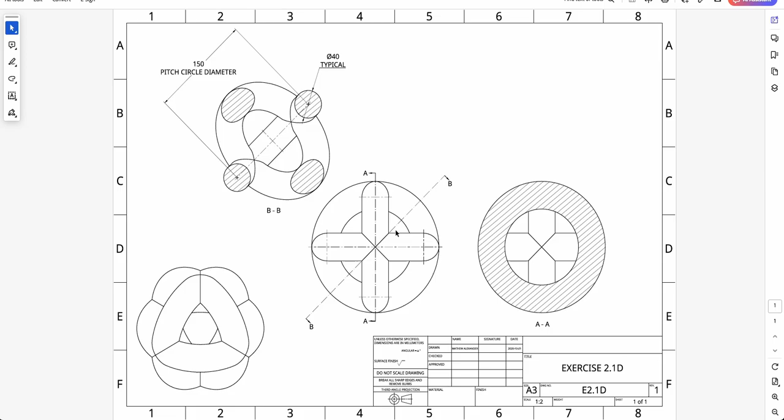Today we're going to be taking a look at this little ball shaped thing. This exercise is pretty simple. We're just going to be doing a couple of 40mm diameter circles in terms of sketches, and then we're going to be revolving them. So it's going to be nice and quick, and then you'll be able to follow along from this drawing.

I'm going to start this one off with a sketch on the front plane. We're just going to do 2 sketches in total, with 2 circles in the first sketch, 1 in the second. I'm going to make that 40mm. Do another one up here, also 40mm.

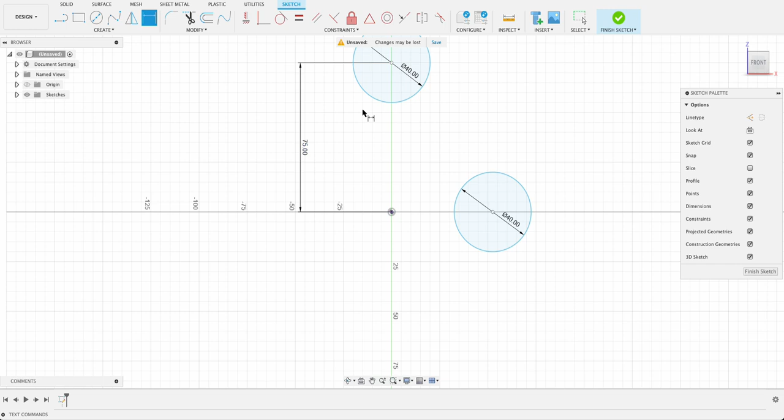Then we'll dimension. I just pushed D to dimension against the origin over there. 150 divided by 2, so you could type 75 or you could make it 150 over 2. I'm making that 150 over 2. Now I can see they're not fully constrained. If I click on it and drag it, it's allowing itself to move in an arc, maintaining that distance of 75mm, so I want to fix that.

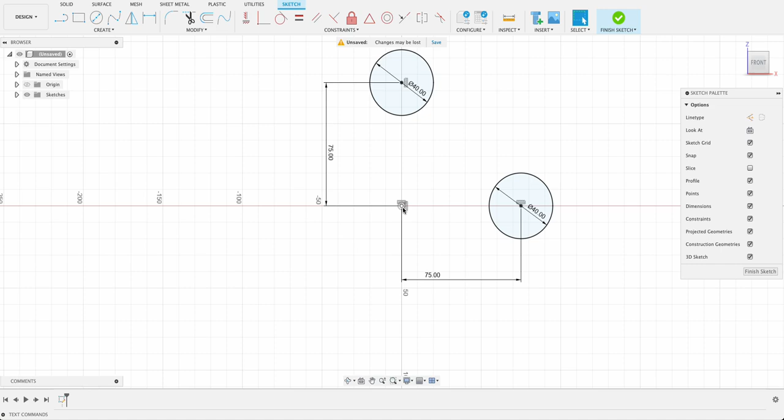I'm just going to add, we've got over here a vertical horizontal constraint. So on both of them I'll add that constraint, and they will be constrained to be either vertical or horizontal to the origin. That's the first one.

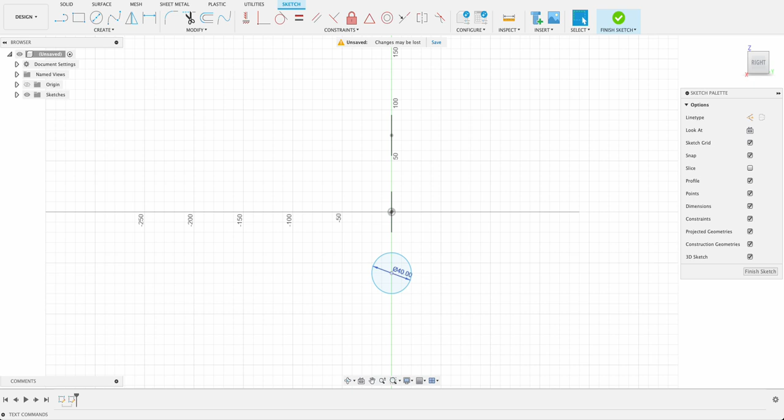At this point we could revolve them, but I want to just do the last sketch and then we'll do it all at once. I'm going to create a sketch on this plane. C for center diameter circle, and again this is 40 diameter, dimension 75, and then the horizontal vertical constraint.

Finish sketch. Now these are going to be revolving around the central axis. So over there we've got the Z axis. Our next one will be

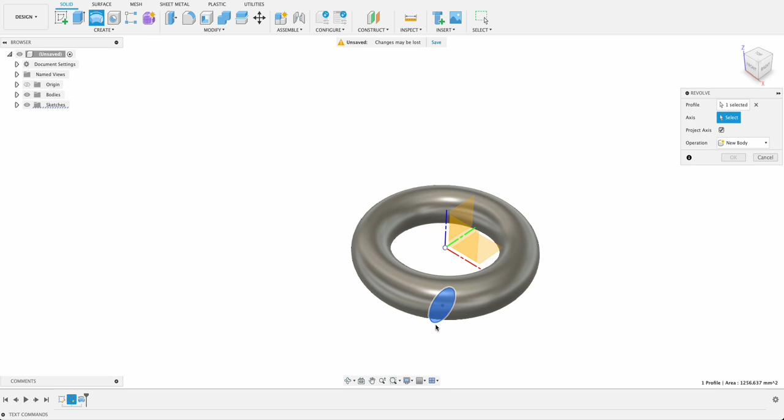the Y axis, and it's not a cut, it's a join. And then I want to turn these sketches back on because we obviously need to sketch that last one or revolve it. So I'll just turn the bodies off there.

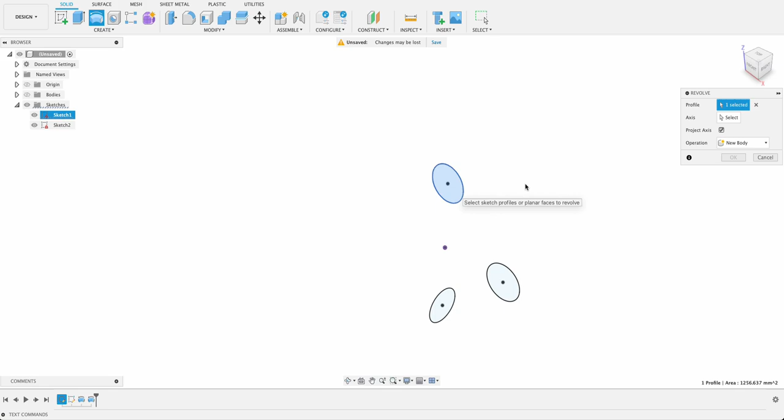Selected that, select the axis. We're getting an error there because it says there's no visible bodies, so I'll turn bodies back on and say join.

Okay, now let's turn our sketches off, and we're able to see exactly what we saw in that drawing. In that drawing I think we had a cross section across one of them.

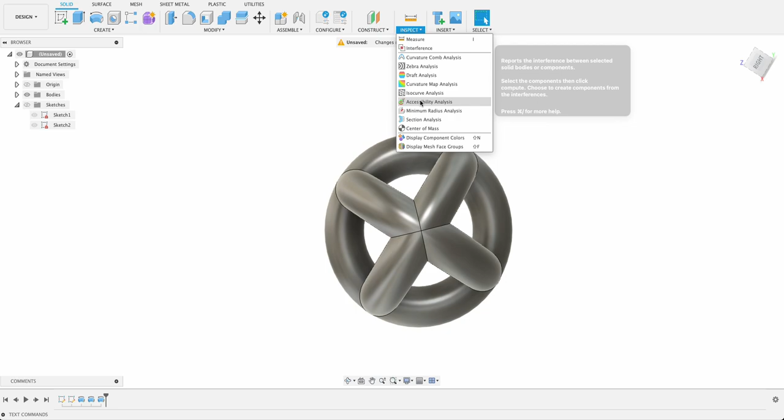So let's have a look here and go to inspect, and we can go to section analysis. The cut plane, we'll pick any one of these, and we can see there, as we move through it we've got the different parts of our, I'm not sure what to call the shape. It's just a bunch of circles or donuts.